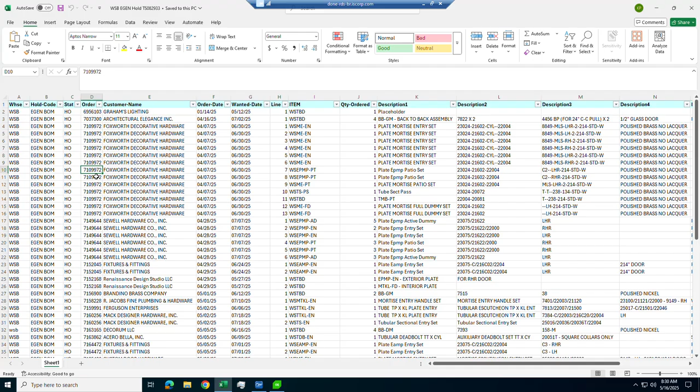We're going to go back over to the team site and look in the Foxworth file for 972. On the regular computer, we'll go down to our team site, 2025 projects, go to Foxworth, then 972. All right, go ahead and open up the spreadsheet.

We'll get into this a little bit more later, but we can see here we've got a couple highlighted boxes and a note about needing custom plates. So there's a couple questions: number one, how do we know that we need a custom plate, and number two, what do we need to do? Because this is a pretty vague question. I'm going to unpack a lot of that here. It isn't necessarily something that needs to be done all the time, but I think it's great training and really good reference. So the first question is, how did we determine that?

That really comes from the catalog. If we take a look at the catalog, there's a couple versions in a couple different places, but there's the J catalog, and then the 2025 door tech manual and price list, where we can look at hardware by component. We're going to look at a couple of these sections, but let's look at hardware by component first.

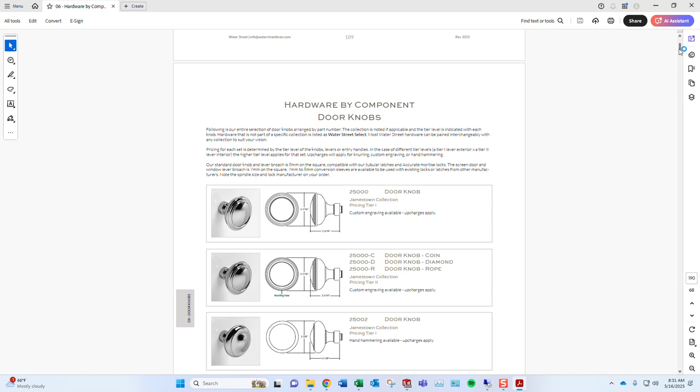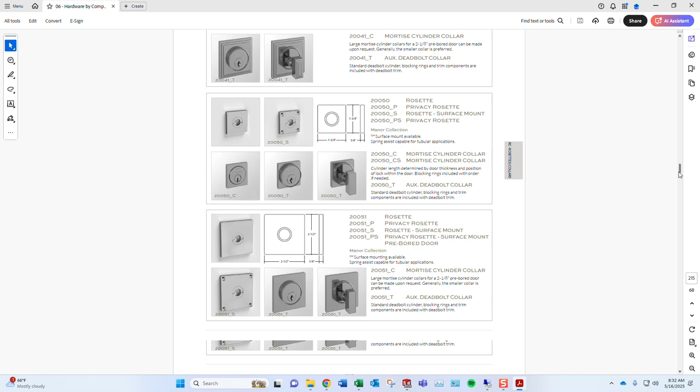I'm going to scroll down. By components, pretty self-explanatory, it gives a listing of all the different pieces in their respective groups - door knobs, door levers. I'm going to go down till we find the escutcheons. Here we go, look at that.

Okay, so we are looking for part 21604. It looks like this particular customer is ordering that for all their escutcheon sets. It lives right here. Now in escutcheons we have really 6 standard plate sizes: large, medium 1, medium 2, small, narrow, and screen door. They are all used for different type functions, and there's some that are standard for type functions and some that are optional for type functions.

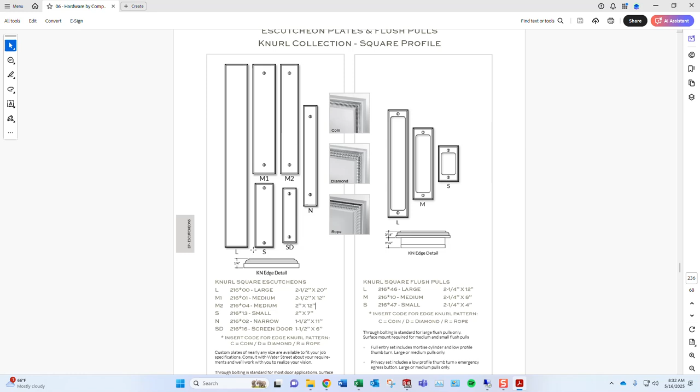You also notice there's a little star right here, and that is because this particular collection has the ability to be knurled, coined, diamond, or roped. So if we were doing, for example, this plate with a coined edge, it would be 216C04 - that would be a 2x12 coin plate. This particular order, they're not ordering any knurling, it's just 21604, so they're going to get the profile just without the edge detail.

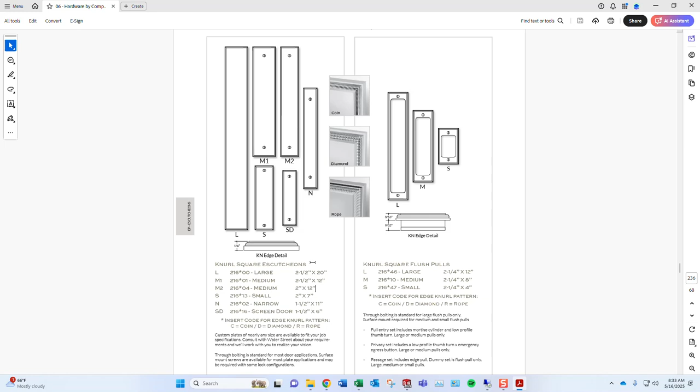So we need to go look at our M2 or 2x12 plate sizes because we need to understand what about this is custom. To do that, we're going to go up to the front of this section. We've already established this is 2x12 - that's really what we need to remember, or M2.

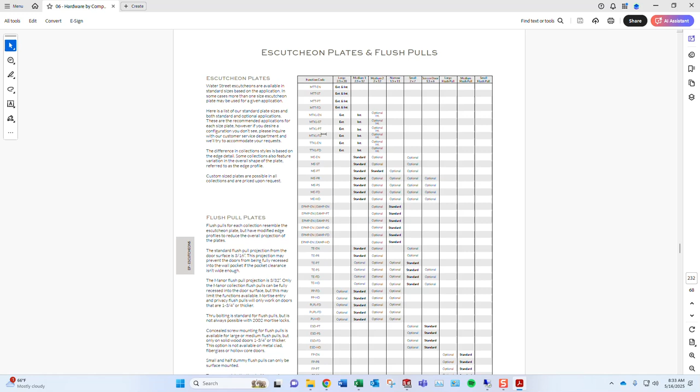So if we just shoot up to the front of this escutcheon section, you will find this lovely chart which kind of goes over our options here. And if I zoom in on this, you'll find the function code, and in bold it will dictate the standard offering for that particular type function. So we've got a couple of them here - if we look, we'll run down this list.

So MEEN, Mortise Escutcheon Entry - you'll notice he's not notated that he needs anything custom, and that's because if we come back over here and look at our MEENs, we'll see a standard offering, and then we also see an optional offering in 2x12 or an optional offering in 2x7. What this means is more than likely Ben has already gone through and looked at this, and he has found a part that exists that will work for him.

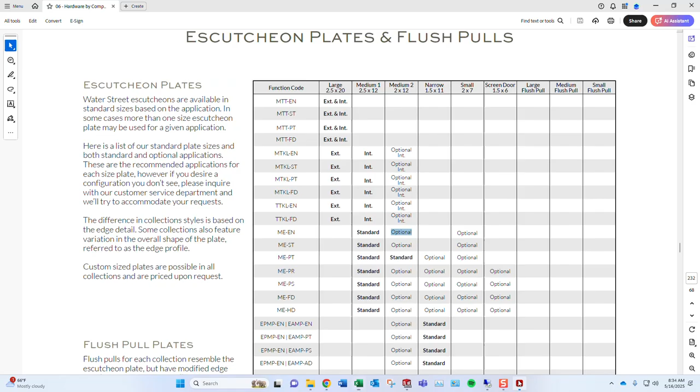So this customer is ordering non-standard, but it already exists under optional for this particular style. Now what we're working on is EPMP, or a Euro Profile Multipoint Patio. So let's take a look at that one. Now we'll see here EP - where is it?

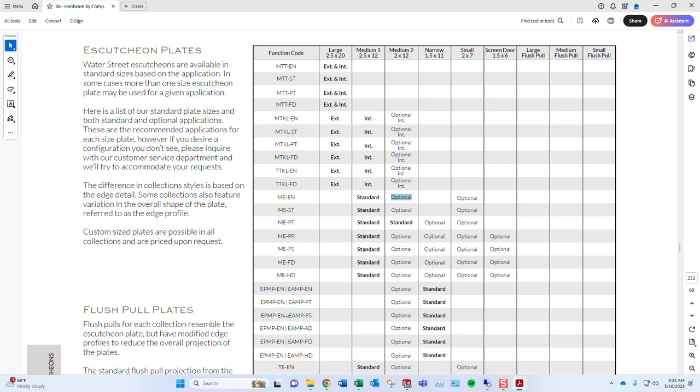That's interesting, so this is actually a typo, but it would be this column right here because we're doing patio. So what we'll see is our narrow 1.5 by 11 is standard for these, and 2x12s or medium 2s are considered optional. So it must be that a stock plate does not exist in this option, which makes sense, and we'll get into that.

Now the next thing we need to do is open up a couple different spreadsheets here, and figure out what we're going to do.

And then the next one we want to open, I don't think I have this one pinned, is on the team site, under Engineering Shared Files. And it is the Door Hardware Function Code Guide. Let me go ahead and open that up.

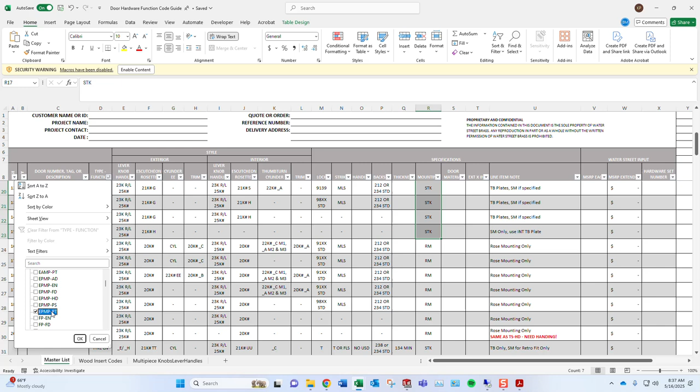So we're going to look for EPMPPT, that's what we look back on our order. So what this is telling us is how we're going to build this. We're going to be looking for a 23 thousands part number in either right or left, and that's a lever, which makes sense. On the interior, same thing, and then you'll see a 21,000 number that's going to end with an E, or have an E in it, for the exterior, and on the interior we're looking for a 21 with a D.

The rest of this we can kind of ignore. The lock number is going to be very important here - that's going to help us dictate the configuration. So let's jump back over here to our order. 21604, we're looking for a C2.

Now where this all ties together is in this Escutcheon Plate Program List. This listing is how we're going to build out a custom part number if we need to. You'll also see this abbreviation chart - that letter we were just talking about is how we subcategorize this particular group called escutcheons. So if we were doing U.S. entry exterior, that would be an A, and an interior would be a B.

In this case, we're doing a multi-point entry interior, which is the same as a patio interior, and then we're going to combine it with a passage exterior, which is, I'm sorry, we're combining it with an E. We could also combine it with a couple other things, we may here, we'll see. But yeah, this system basically lists the methodology of how we've come up with all of this.

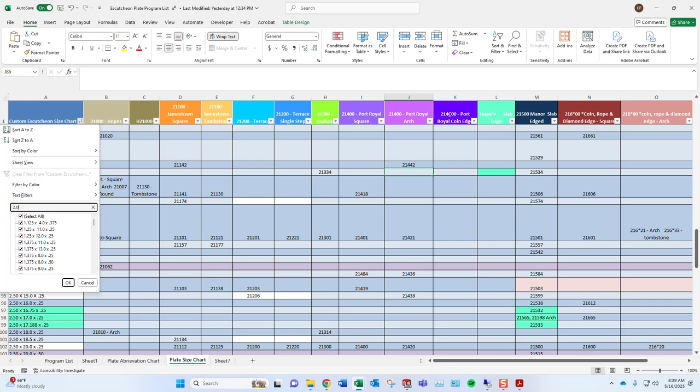So essentially the plate size chart - if we go and look for, let's say, a 2x12 like we're working on, we'll find our 2x12 size, and generally we'll find a listing of all the different profiles and what the part number is for that given size. The first two numbers, the 2-1, indicate that it's an escutcheon, or 21 thousands. The next number indicates what the profile is. So the first profile is Jamestown, so those will all be 2-1-1s. Then Terrace will be 212, Hudson 213, Port Royal 214, Manor 215, Coin Rope Diamonds 216, and we also have Madison, which is 217.

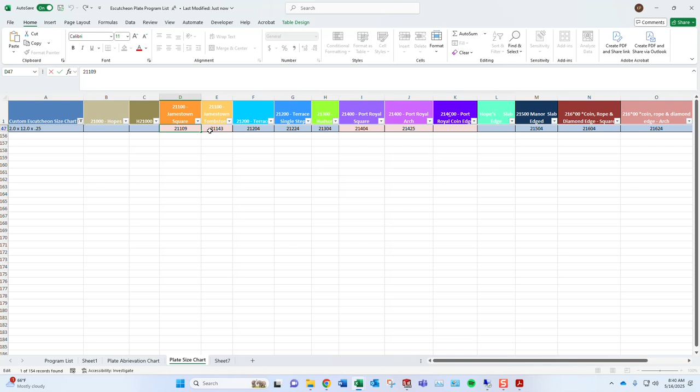Then the next two numbers, 09 or 43 or whatever they might be, that's the number that's unique for that given size, and it's just sort of assigned. So that's the first part of the number. Then whatever that particular escutcheon does, that becomes the letter at the end of that.

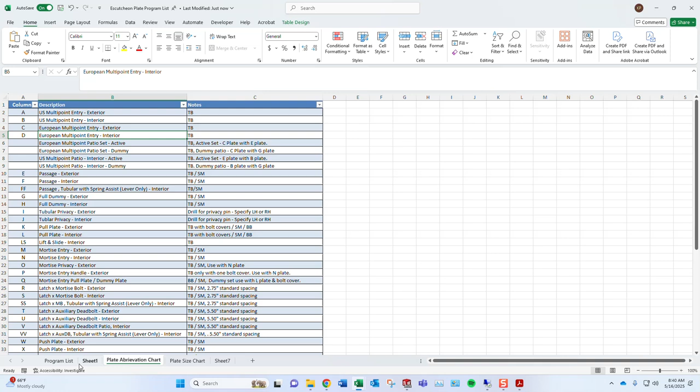A D, like 21204D for a European multi-point interior. And then the last thing we need to do is assign it a program number. The CNC machines can only store a 4-digit code as their program number, so this is essentially almost like a UPC, a unique code that goes on the end. So in engineering here, we're really focused on the front part.

21204D2394. That's interesting. Oh, that's a different one. Anyways, so that's telling us what it is. It's a 2x12 terrace European multi-point entry, and then really for the shop, they're looking at 2394. That's the number that matters for them.

So at this point, we could dive right in and make a couple custom plate numbers, but one thing we usually want to do is check and see if what we're looking for already exists and maybe Ben missed it. Then the next thing we're going to want to do is figure out exactly how we're going to go about making this custom part.

So to do this, we're going to go take a look at our existing catalog of parts. We're going to go 21604. So what I'm looking at here right now is I need to go look for 21604 plates. I know based on the hardware function guide that I need to find an E plate and a D plate. And then the other thing that matters when it comes to multi-points and a lot of other things is C2 specifically.

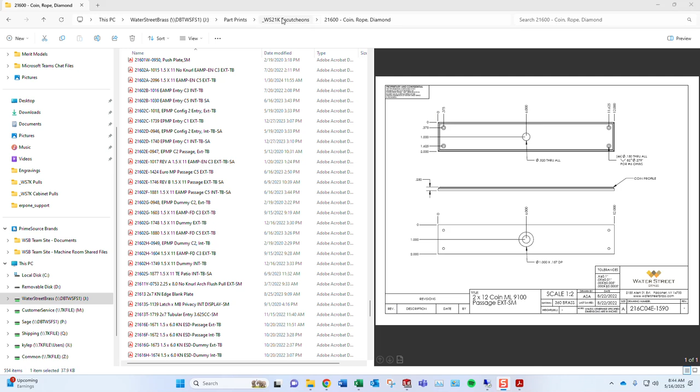Now, I'll say this. So now we know we're going to have to make something, right? And that makes sense because that's what Ben was looking for. The way we handle our escutcheons has changed recently.

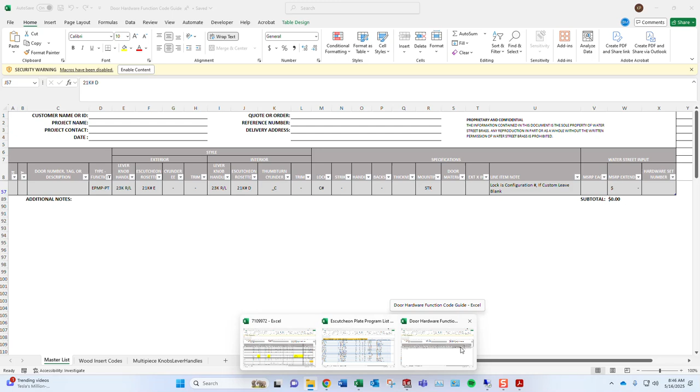So escutcheons changed, and we used to store everything in these different groups. Now we use something called the stock plate program, and it lives in this standard plates folder. This is the place you're going to want to go in order to find something to build off of. So, like we were looking at prior, the standard for this particular group is 1.5 by 11.

So what I usually recommend whenever we do anything like this is to go find the standard stock plate file and then modify the overall size and add the profile. I find that that's a much safer, more consistent way to do this. Yes, there's 100 ways you can do this, but I just prefer that method.

Then we know we're working off the most recent information and the most recent spacings, right? Changing spacings can get a little bit worrisome. Usually it's better just to change the size of the plate. So 1.5 by 11 stock plate.

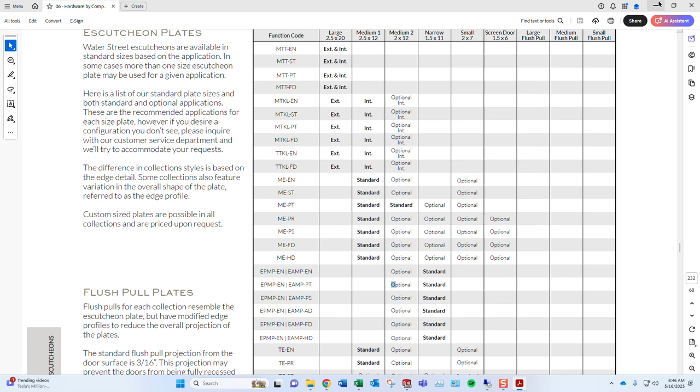We're going to come up here where parts prints and escutcheons, standard plates are. We're going to look at our 1.5 by 11s. And then, like we were talking about earlier, we need a D plate.

Now, you'll see these are marked C1, C2. There's actually 6 configurations, but we know that C2 is the one we're working on. So I'm just going to go ahead and open this up. This is obviously just the PDF, so just hang on to that for a minute.

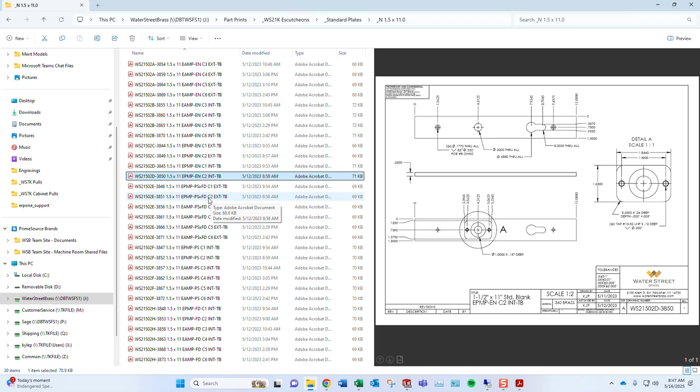And then the other one that we know that we need is an E plate. In this case, we want a C2 E plate. So we're going to go ahead and open that one up as well.

Now what we're going to do is, let me back up, we're going to go over configurations as well for multi-points. So I'm going to jump back over and grab another page out of the catalog.

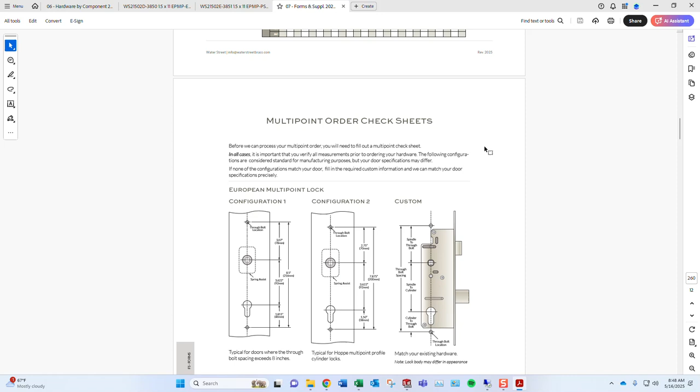Forms and supplements. When it comes to multi-point specifically, the multi-point is a little bit unique, but we do not provide the lock in multi-point. They come pre-built into the door. They're generally run from the bottom of the door to the top.

And we've really pared down all the different manufacturers into 6 configurations. There's 2 European configurations, which we call configuration 1 and 2, and by configuration we're really just looking at the particular spacings for the through bolts and the spacing between the lever and the cylinder.

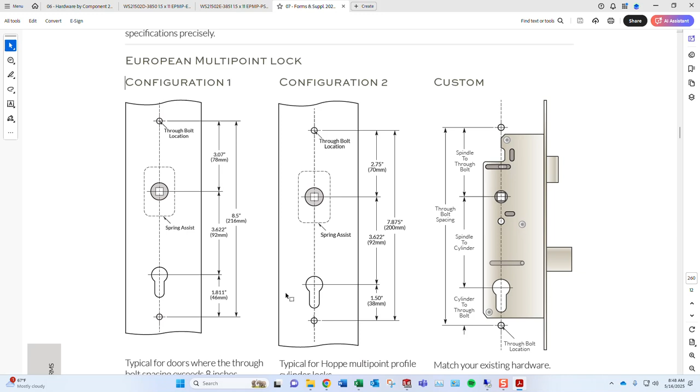And then in American there's 4, so 3, 4, 5, and 6. Again, they're all a little bit different, and these holes are usually pre-drilled into the doors. So it's important that we can just line up and they can mount our hardware. And then this one is 6.

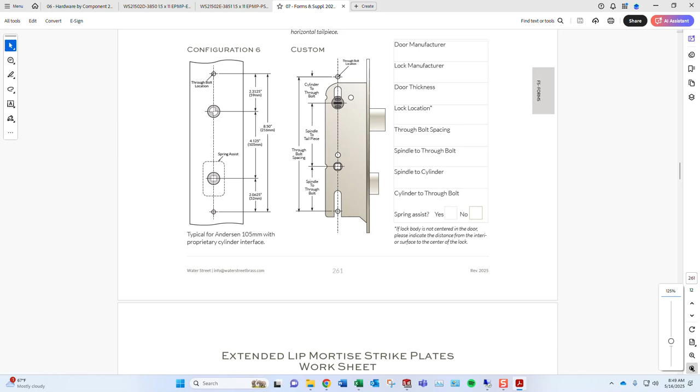Obviously there's customs for both, so customers will sometimes submit those, and then we'll have to make a custom escutcheon to match what they're doing.

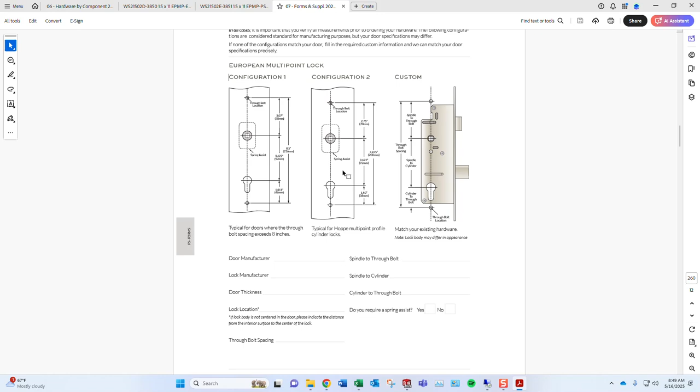So this particular order, the customer had specified configuration 2, which is a 7 7/8 center to center for the through bolts, and then 2 3/4 for the through bolts, and then 2 3/4 from the upper through bolt down to the lever, and then 92 millimeter or 3 5/8 from the lever to the center of the cylinder.

And if we were to look at these and crunch these numbers, you'd find that this layout here matches that. So we want to maintain that layout, and we just want to modify the overall size of the escutcheon.

As a general rule, in multi-point, we keep the midpoint between the through bolts as the midpoint of the escutcheon. So that sometimes means that the distance between the midline of the escutcheon to the lever hole can change a little bit, but the symmetry here is the distance from the edge of the escutcheon to the through bolt it's respectively closest to.

When we do other types of escutcheons, like mortise lock escutcheons and things like that, we will change the through bolt locations on those, but we'll keep the distance from the center of the escutcheon to the center of the lever fixed, and the through bolts will change slightly.

But today we're working on a multi-point. The distances, these numbers here, are all going to stay the same relative to each other, and we're just going to change the outside. The other thing you'll notice here is obviously there's no profile on this, so we're also going to have to go in and add our profile.

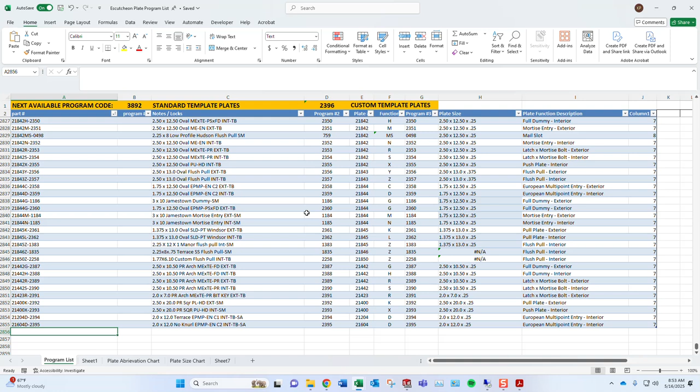Now you'll notice the number at the top is still 2395. As soon as I put that number in my program number 2 chart right here, it's going to switch to the next number, 2396. And then as you can see here, this is kind of just laying it out for us: European multi-point entry, interior, 2 by 12 by quarter. That's all good. Now we've got our part number.

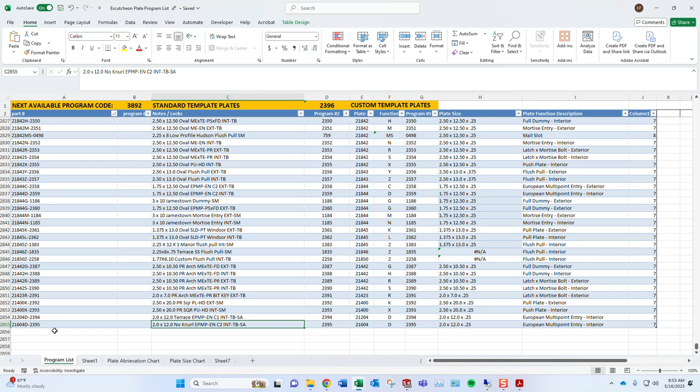21604D-2395. We can go ahead and we can start to make this thing.

Again, I'm going to run to, I'm on the J, under parts prints, in the SolidWorks section. I'm going to go to the 21000s. And like we talked about, really trying to usually start with a stock plate or standard plate program. So I'm going to come in there. Now, like we talked about earlier, for this particular type function, 1.5 by 11 is the standard.

And then I am building a D plate for C2. So I'm going to open the part and drawing for that, which is the same one we have open, the PDF we have open, the 3850. So we're just going to open up a solid model for these. Like I said, until there's word otherwise to say whatever, I mean, I'm not trying to rock the boat my first one.

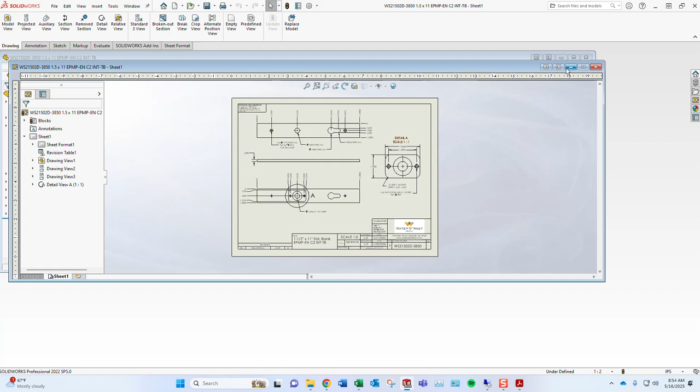All right, and then the first thing we're going to do is we're going to go ahead and save this under our new part number. So we're going to go File, Save As. Again, like having the drawing open makes our life easier.

Now, this is not going to be a standard plate. This is going to be a custom plate, so it needs to go in the custom section. So we're going to back up, so we're just under Parts Print SolidWorks 21000s. We're going to go down to our no knurl plate section, open that up. Now you'll notice that this has a WS in the front of it.

That's a complicated thing, but we're going to want to remove that when we save our custom plates. So this is going to become, I'm going to leave that stuff on the end, this is going to become 21604, 21604, and then this is D dash 2395, and it is a 2x12.

2x12, no knurl, EPMPENC2 interior through bolted dash SA. Let me just confirm I got that right. 604D 2395. Okay, so I'm going to go ahead and save that.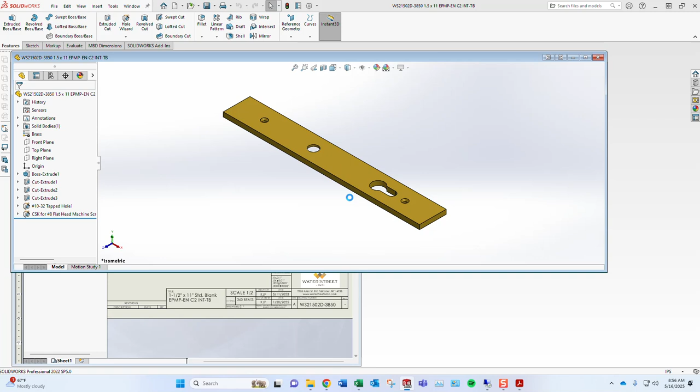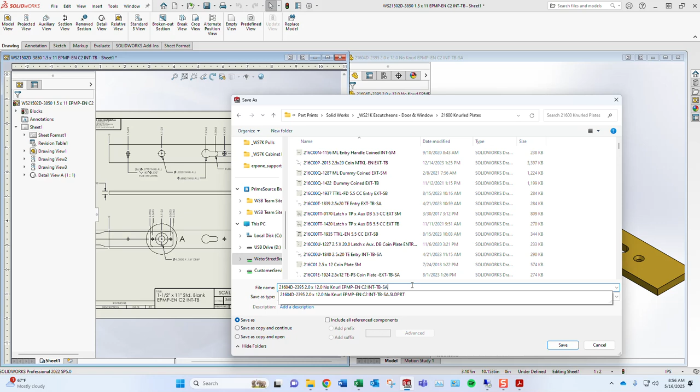And then we're going to do the same thing for the print. Again, we're going to drop back to 21s under SolidWorks, come in here to our knurled section, start to put that number in. Oh, look, there it is. Wonderful. And you could do this a couple different ways. You could start with the side step escutcheon blank, and then you could just redraw the through bolts and everything and put those in. You know, I find this method quicker, and you'll see why here in a few minutes. Got that. Enter.

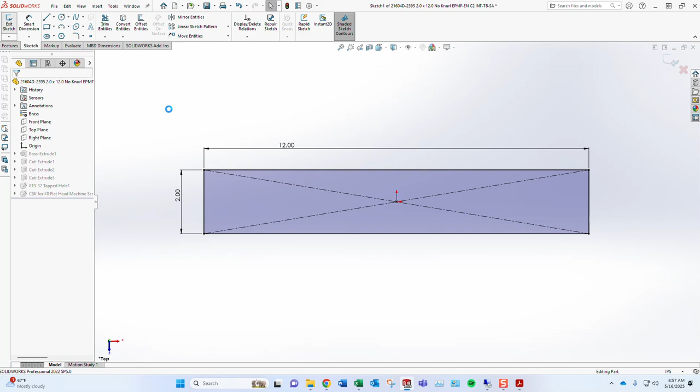So the first thing we're going to do, obviously, we're going to just enlarge this, and I'm going to kind of rip through this a little bit. Just going to change the overall of the base to 2x12. Okay, now we'll probably need to, that actually looks like it went pretty well. I'm just going to say we might need to move some of this stuff around.

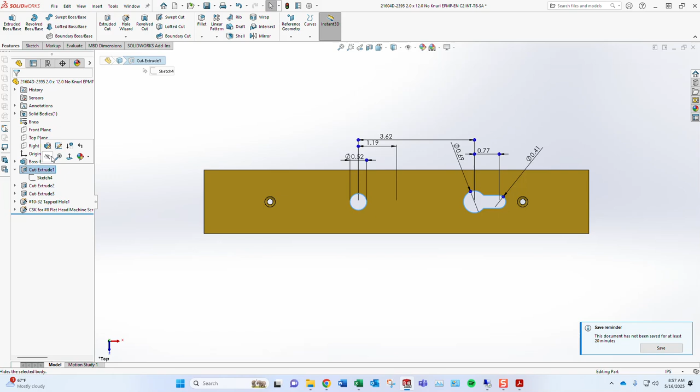So this was all based off the center already. We can kind of see here when we look at the drawing under this first cut extrude, we're based off the origin that was put in the middle of this part, and then we're based off of that origin. So that didn't move when we changed the height and width.

Same thing for the through bolts. It looks like we're also picking that up off the origin, so we actually don't even have to do anything here. This is now a 2x12 plate. All we have to do now is put the profile on.

So in order to find the profiles, I'm just going to save this real quick. In order to find the profiles that you need to cut, you are going to want to go to J, and then parts prints, and then you're going to go to the 21000s. Actually, you know where we can go? We can go to standard plates, and we can go to profiles.

This is a listing of all the profiles and the different edges, and we're looking for one of these 216s until we find the one that we're looking for. We're getting there. There we go. I'm just going to open this up.

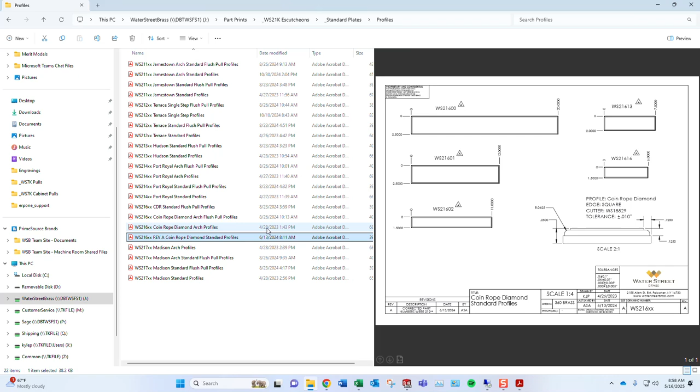We went back and forth several times on this. Here's that 21604, is in here, by the way. It should be in here. Maybe it's not. Looks like it's not. Anyways, this is the profile. This is the coin rope diamond profile that we're using.

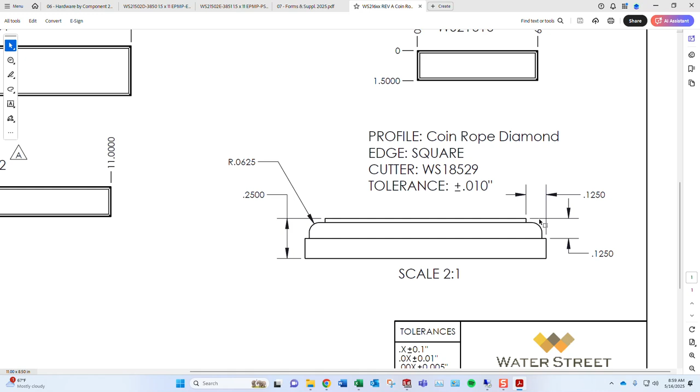And it is a 1/8 by 1/8 inch profile, and it has a 1/16 of an inch 90-degree radius in it. So that's pretty cut and dry. We're just going to go ahead and make that.

And some of this I know because I've obviously built this one a lot. Now, we could do like a horizontal relationship here, we could do a tangential relationship here. That's not really critical, but what we know is this is a full quarter round radius. And because this is 1/8 of an inch by 1/8 of an inch, and this is a 1/16, all the rest of these are all 32nds of an inch, so we can just make them all the same.

Bigger than those? Right, and then what we can do is we can set this, and when we do stuff like this, we do want to generally carry it all the way out. That's just going to help us from getting any kind of rounding errors.

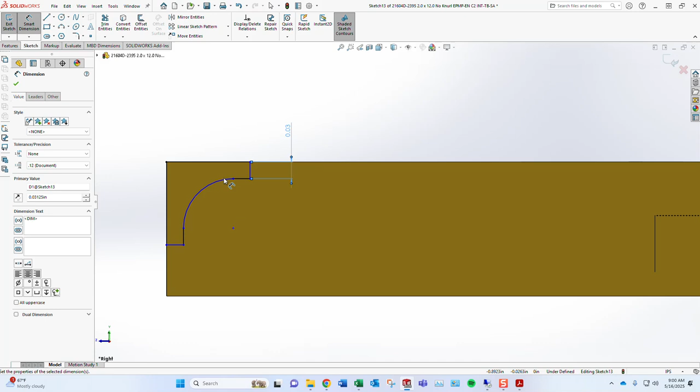So 2 measurements, I've got that done. If we were to check this, we'd see, and that's again going to be a driven, but there we're exactly 1/8, which is perfect. And I'm a lazy engineer, so we're just going to do a mirror feature off the center line.

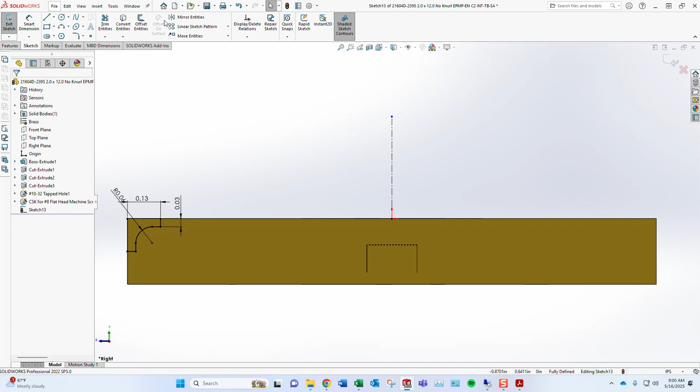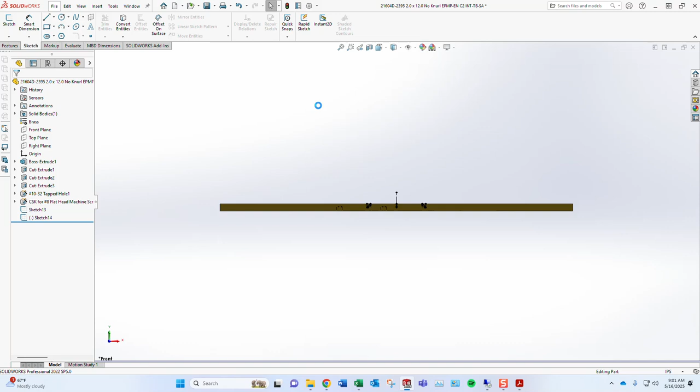This is one of our very first collections, and this is different, more like what you're talking about. Before I do my extruded cut, I'm going to exit this sketch, and then what I'm going to do is I'm just going to copy this, and stick it in the other plane, and go ahead and grab that thing, and then these rods.

And I'm going to hide the other one just so I don't pick it up inadvertently, and then I'm just going to relocate this stuff so I don't have to take the time to redraw it. Not that I spent a lot of time on this one, but some of these other profiles, ooh, that's kind of fun. Make that horizontal.

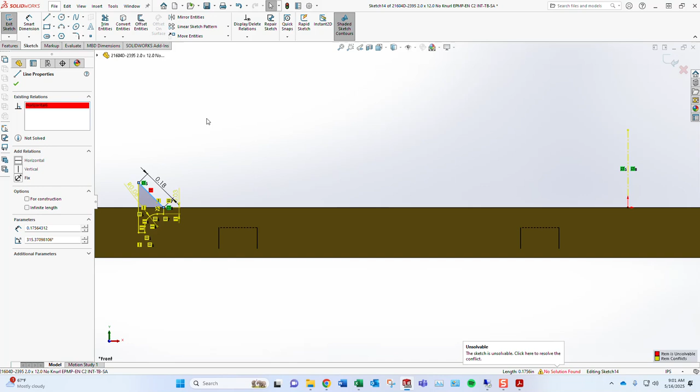Fix that in a minute. Big thing is we just want to get this thing back over here to the edge where we're headed and pin that baby into that corner. And then there we go, like the horizontal that time.

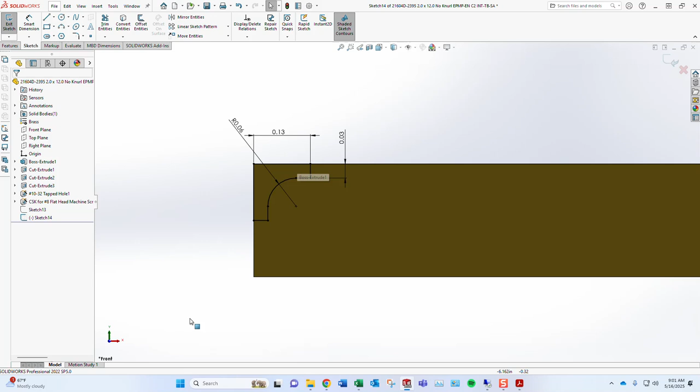So now we've got a solid black part. We're pinned up on the corner. We pinned our mirroring line to the origin, so we look at our other side. We're good to go.

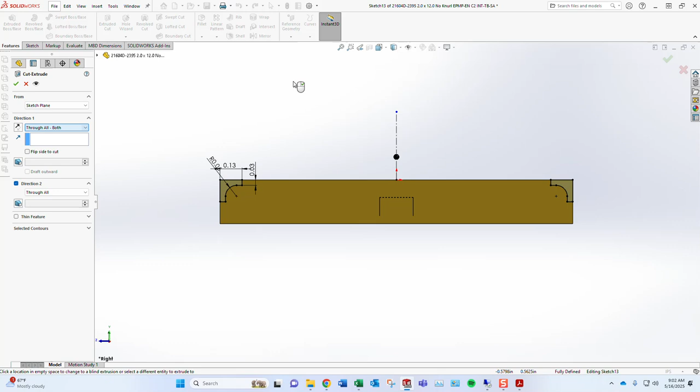Now we're just going to jump back into that other one. Again, 100 ways you can do this, I'm sure you know, but we're going to just do a through all both. Cut it on both sides, that's perfect, and then pick up our other one and do the same exact thing.

I have observed that you usually have to toggle this cut to get it to work both ways. There it goes. Bam. Alright, so we are done.

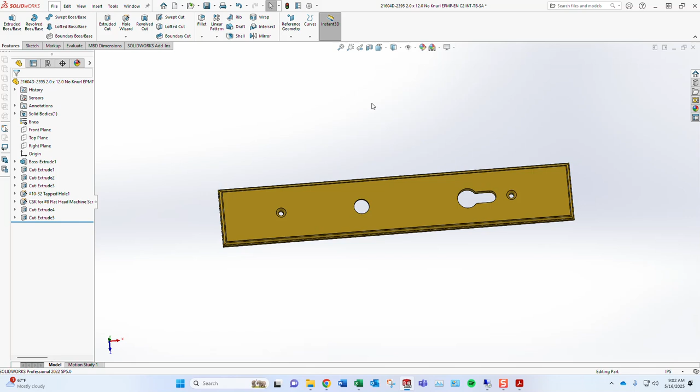We took a 1.5 by 11 inch plate. We enlarged it. We did not have to move any holes because of the way this part was laid out originally, which was really, really nice. That's not always going to be the case.

Then we profiled it. If we were doing coin, rope, or diamond, we wouldn't go through the process of putting that on here. We would just notate it on the print, so it would look just like this part. But yeah, we are ready to go to the print phase here.

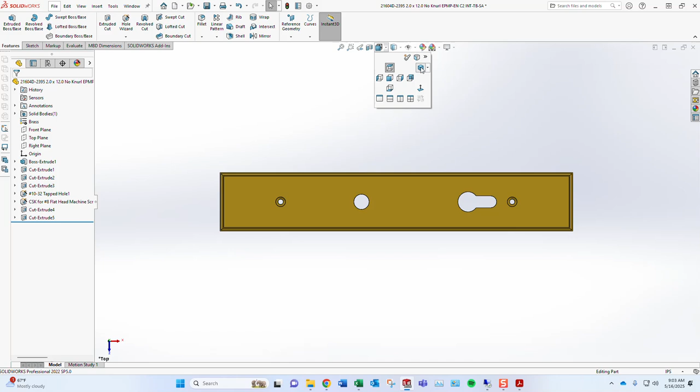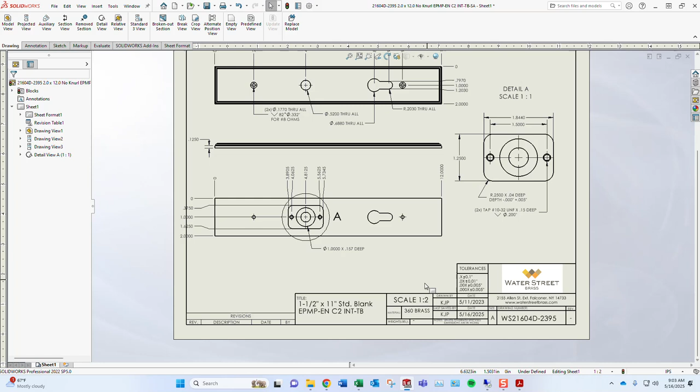So I'm just going to save this thing. Jump over here to my print. Of course, the first thing that I'm going to do is change my part number on my print. 21604D-2395. I'm going to change my description.

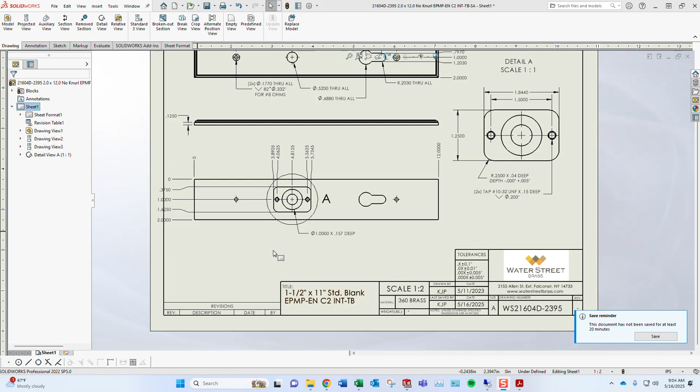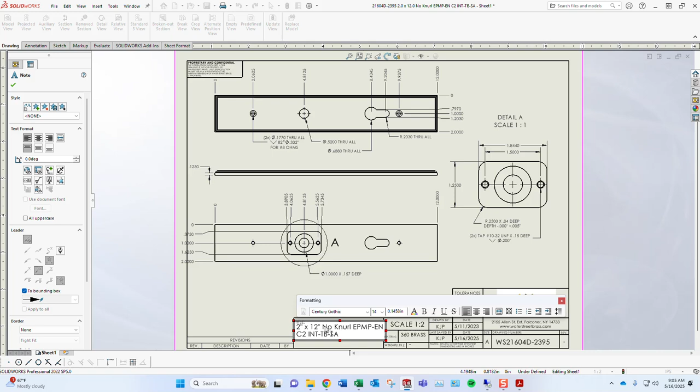Go edit my sheet format, just change it to today's date. My tolerance stack is good. My address is good. I'm drawing it, so I'm not going to modify that. All right.

And because of the way we built this, there is not a lot of measurements here that we need to change. If we'd gone through and drawn this from a blank plate with all these holes put in, we'd have to be redimensioning and redrawing all this stuff.

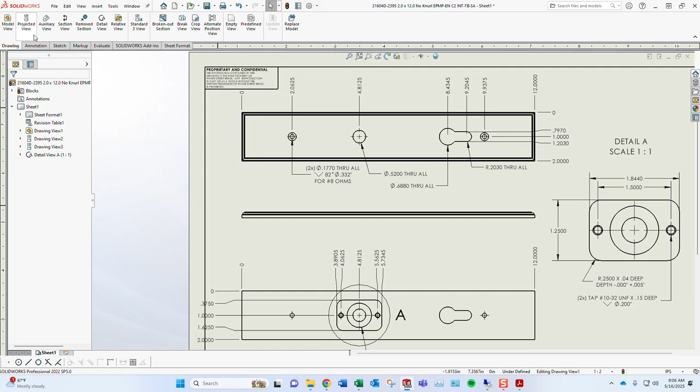We also got kind of fortunate in that when we did that cut in both directions, we didn't lose our datums. Real quick on datums, we follow pretty standard practices, right?

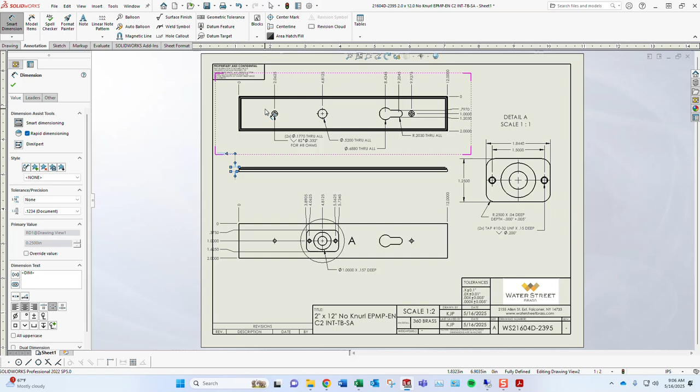So when it comes to rectangular work, like escutcheons, the top surface is going to be our vertical datum, which we're going to ordinate dimension from, and then the leftmost surface is going to be our left datum point that we're going to ordinate from. So upper left is our machining origin, and everything is based off the top surface of that respective view.

In this case, these are all through holes, but if we had a pocket here, we'd be measuring it off the top surface. A good example is this drawing right here: even though technically this 1-inch counterbore is within the pocket, we're giving our depth measurement from the topmost surface. We're not going to stack that measurement.

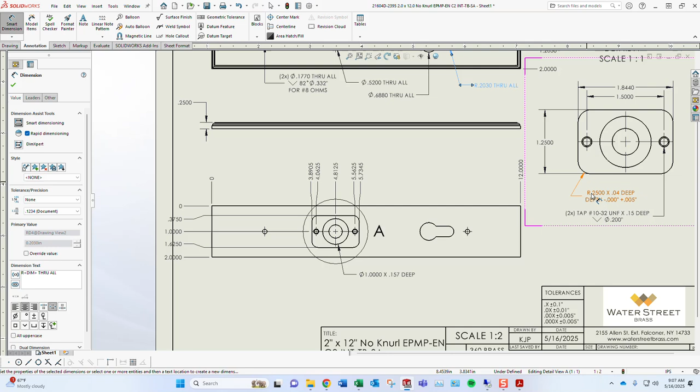Same thing here, this says the tap is 150 deep, but it actually starts at the bottom of a 04 deep pocket. So it's really only an 11 deep tap, but we dimension it off the topmost surface.

So all I really have to do here is just move some stuff around and get it all to fit. Obviously we made that plate a little bit longer and a little bit wider. Should be pretty straightforward though. Nice, easy little project. Sometimes they're a little bit more complicated than this. This one went pretty well.

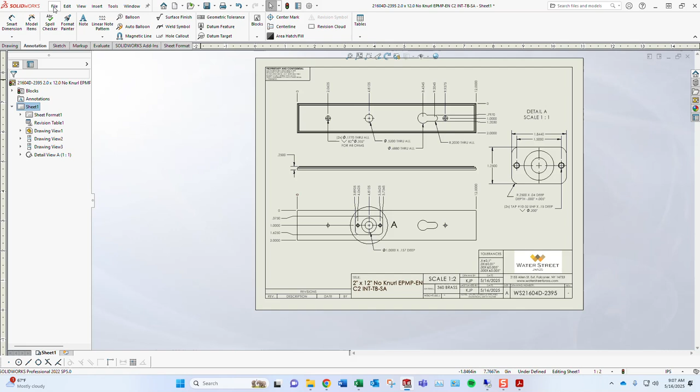So now I can save this, and then I can make it into a PDF. Again, our PDFs live in a different area than our SolidWorks files. They're still under parts prints, just on the top level here. Escutcheons, same thing, we're going to go down to this coin, rope, diamond area. Go ahead and save this.

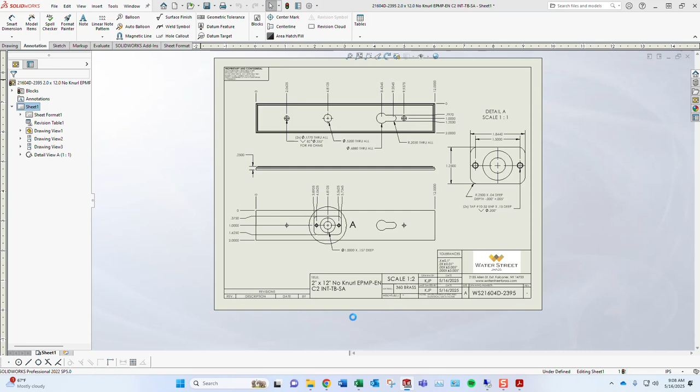Now we can double check this just for fun. We're going to just double check these numbers. So, 9.9375. I'm just subtracting 2 1/16 from that.

I get 7.875. When I look at configuration 2, I should have 7.875. If I take 12 and I subtract 9.9375, I get 2 1/16. So I know that my through bolts are centered because I'm 2 1/16 to here.

I'm going to take the lever number 4.8125 and subtract 2 1/16. I'm going to get 2.75. Like we said here, from this through bolt to our lever, 2.75. That's good. And then we could check either one of these, but A plus B plus C must equal D, so if A and C, or A and B, are right, then we know we're good to go.

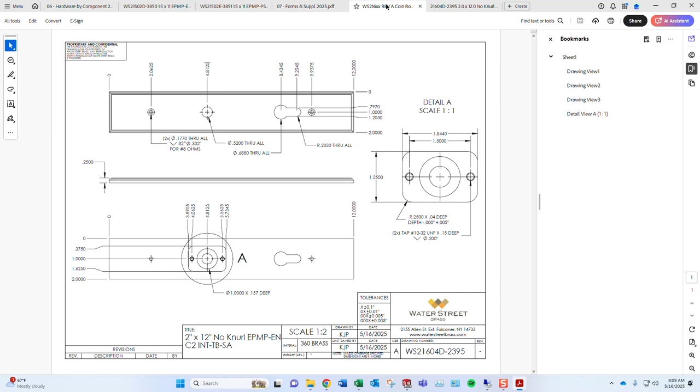Let's go ahead and check this measurement here. 8.4345 minus 4.8125 - so this number minus this number gives me 3.622, which when we look here is exactly what we should have, just 92 millimeters. So it's centered, it's good. I mean, we kind of already knew that because we didn't touch any of that, but just running through that for purposes of an exercise.

This print's done, good to go. Now, of course, we need to go ahead and set it up in ERP. How we do that is going to be very similar to the previous project. We're going to have to assign a UPC code, and what we choose to copy this off of does not have to be the same thing we copied from in SolidWorks. What is easy to copy through in SolidWorks might be more difficult to copy from when it comes to ERP, but we'll take a look at it.

So first we're going to open our UPC generator. Looks like Ben's in here. We know where he's at, so we're good here. We can go ahead and start typing.

Now in the UPC generator and in ERP, we do have to put in the WS. So it's going to be WS21604D-2395. But we're not quite done yet.

When it comes to escutcheons, we have an extra code we have to put on. It's kind of a leftover from previous methodologies, but in this case we used it to indicate belted plates and buffed plates, and we'll get into that with finishing details later. But just to be on the safe side, always run everything as -BF for buff. Can't really go wrong there.

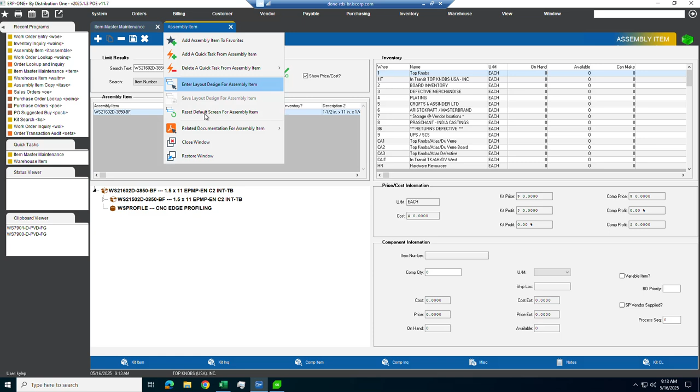So we could use this and we could copy this part. If we wanted to, we could copy - sometimes you can find something that's already really, really close to what you're looking for. I don't see anything here that we really probably want to use. So we're just going to go ahead and... I don't like that.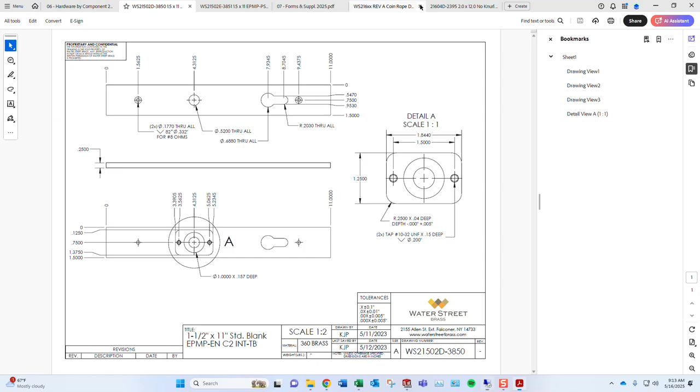We're just going to go ahead and copy this one. We just need to be careful with what we're changing here. So I'm going to grab that number. I'm going to run ITASC - it preloaded the number for me. We're doing a 21604D-2395-BF. Let me just make sure I did that right. 2395, yes, okay.

So again, item copy - we're going to put in the existing item in the first box. The second box is going to be the item we're creating. I press the little go button.

Now, one thing I need to do here is I need to change both of these, right? Because I'm not going to make this out of this plate that's already been made. What I am going to make it out of - I could either make it out of raw material, which would be acceptable, or I could make it out of just a cut blank, is what we would call it. And so those are going to be in the manner grouping, so they're going to be 215 numbers, and then usually it's whatever those last two digits of the code are.

If you're doing a square plate, it's going to be those. So in this case, we are going to have to switch 21502D-3850-BF. We're going to just switch that to 21504.

Now the next one we're seeing is CNC edge profiling. That only applies to the stock plate program, so we're going to switch profile to just mill. We'll see, look at that - so there we go right there. 21504 is a 2x12 by quarter inch Manor blank, is what it's called.

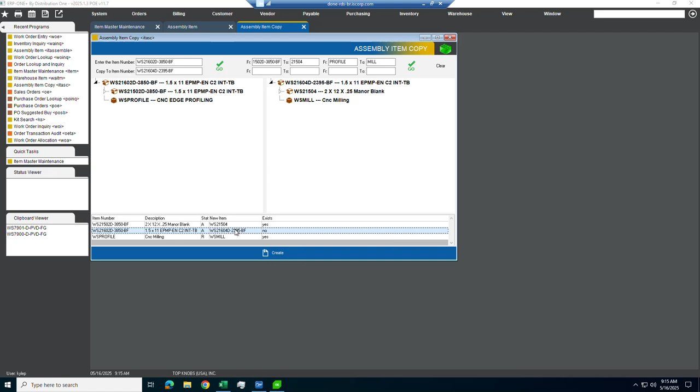Instead of doing profiling, we're doing more than just that - we're actually going to be doing milling. So we come down here, we can see that both of those items exist, which is good. We don't want to be making either one of those new, that's a previous part. The only new item we're making is the one new part we're doing. So I'm going to go ahead and press create.

We got one item record, one warehouse record. So I'm going to come in here to this, and then if I re-click this, you'll see there should be one more in there now, 21604D2395.

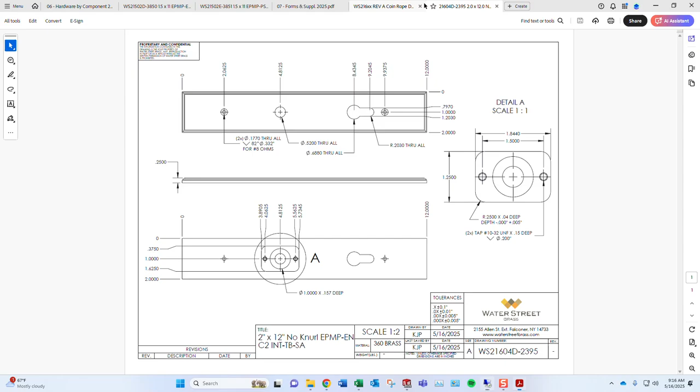Let me go pick up my UPC code - grab that UPC code we made earlier. Remember, we're on the main tab. Now we're going to jump to the unit tab, change the UPC code. All the rest of this, we can just leave it just the way it is. Again, we are making it, so WSB needs to be the vendor.

Key here looks okay, it's brass, made in USA. For the profile tabs, I don't see any information, so I'm inclined to just leave it the way it is. So we're good here.

Let's go check the warehouse now. So the warehouse, again, we don't actually know what our standard cost is going to be, so we're going to zero that out. There's no pricing listed here. The location is already marked as dock, which is great - we don't have to change that.

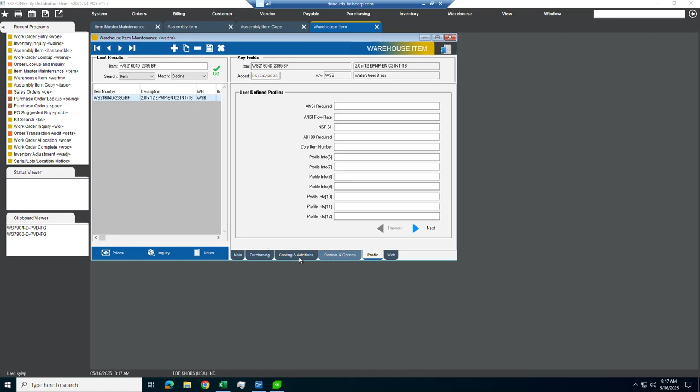For purchasing, we want to make sure there's no mins and maxes present - all this is all zeros, that's great. Again, WSB is going to be the vendor, and like we talked about earlier, the buy type within this warehouse is always M. So we're going to save that. Like we talked about previously, we can visit these other tabs, but there's really nothing here we need to worry about, so we can close the warehouse.

Now, I could type it in here - I've already got the assembly open. You could type in the code we want, WS21604D, and pull it up - so there it is. Or we could come through the item tab here, and we could just press the assembly button at the bottom. Gets us the same place.

And we just want to make sure we got our quantities right. So for this Manor blank, we just need one blank to make one part. That's perfect - you notice that the unit of measure here is in each. Our previous example, we were building out of raw materials, so the unit of measure was 1/16 of an inch. This is an already cut piece, so just one.

And then for the milling, when in doubt, usually just set this at 300 seconds, which if I remember right is 5 minutes. Yeah, just set everything at 5 minutes. There's a process on the back end that after this gets made, this number will get corrected, but we certainly know it's going to take us more than 30 seconds.

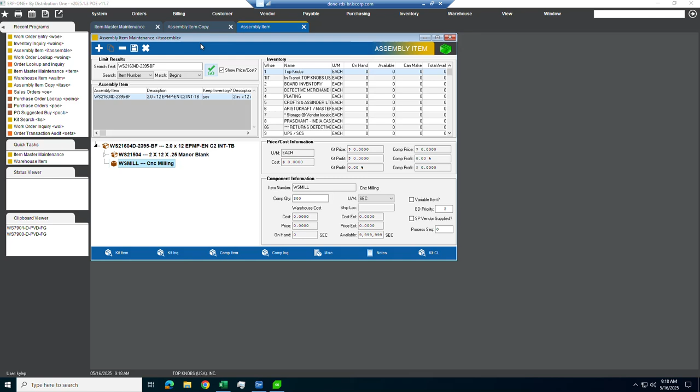So, and we can save that. So this part is now all set up.

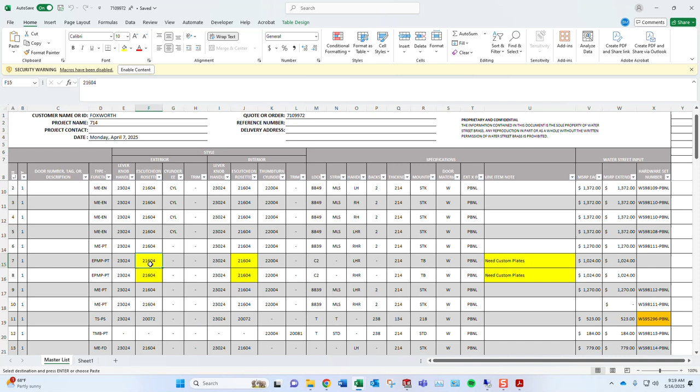Now for this particular job we're working on, because both of the type functions are the same, it looks like they're just different handings. That plate we just made will cover this requirement right here for custom plates. And I'm going to leave it up to you to go ahead and do the same thing for this side right here. Now we don't have to put these on a sales order, we don't have to do anything like that. That is the bill, the detailer's portion, which we'll get into that. But for this video, that concludes what we're working on.